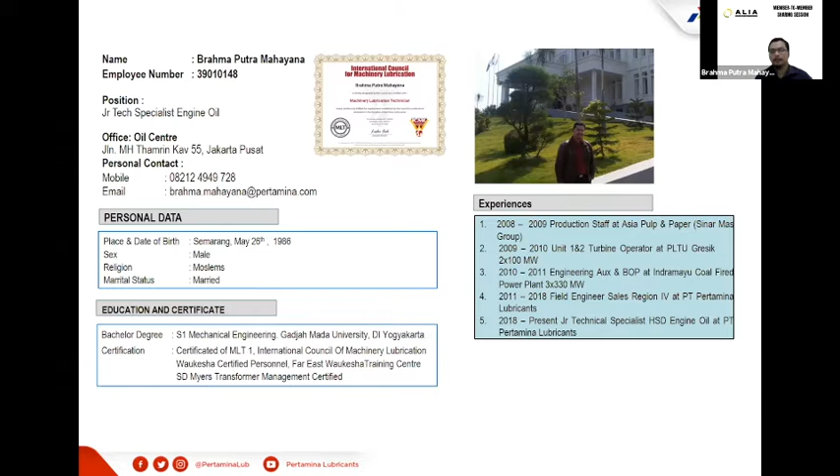Before joining PT Pertamina Lubricants, I had some experience in paper mill at Asia Pulp and Paper, and after that I worked in a power plant as a turbine operator, and then in engineering in auxiliary and balance of plant at Indramayu Coal Fired Power Plant. I joined PT Pertamina Lubricants in 2011, and until 2018 I was a field engineer for sales region 4. From 2018 until now, I'm in the position of junior technical specialist of high-speed diesel engine oil at PT Pertamina Lubricants. So basically about 9 to 10 years in the field of lubricant and lubrication.

Okay, let us continue. So what is the background of the implementation of biofuel in Indonesia? Biofuel in Indonesia is based on government regulation number 12, year 2015, about the provision, utilization, and administration of biofuel as other fuel. Our president, Joko Widodo, wanted to implement mandatory use of B30 in January 2020 and increase the bio content to 50% by the end of 2020, but until now we still use B30 in Indonesia.

So the roadmap starts in 2015 with some sectors like micro enterprise, fishery, agriculture, transportation and public service obligation, and also 15% in transportation non-PSO, industry and commercial, and 25% in power generation. But right now in 2021, most of all sectors are using 30% biofuel as their fuel.

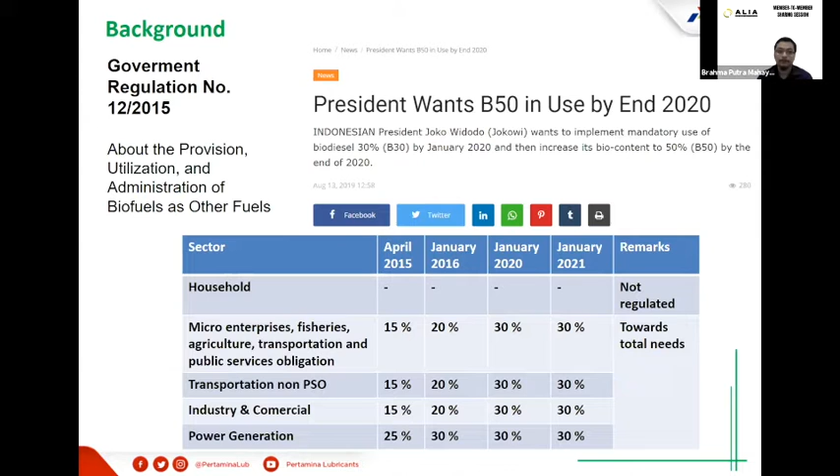Now the biodiesel that is used refers to vegetable oil or animal fat-based diesel fuel consisting of long-chain alkyl ester. In short, this is what we call FAME, which stands for fatty acid methyl ester. The notation or numbering of biodiesel is, for example, B20, which means it consists of 20% fatty acid methyl ester and 80% diesel fuel. Right now in Indonesia, we are using B30, meaning 30% FAME and 70% diesel fuel.

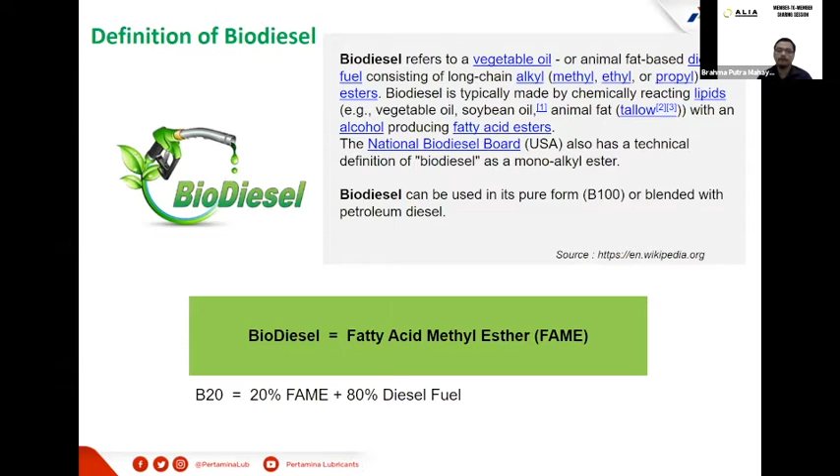So the FAME itself is produced by esterification of vegetable oil. Basically vegetable oil or other animal fat is combined with alcohol with some catalyst, producing glycerin and FAME.

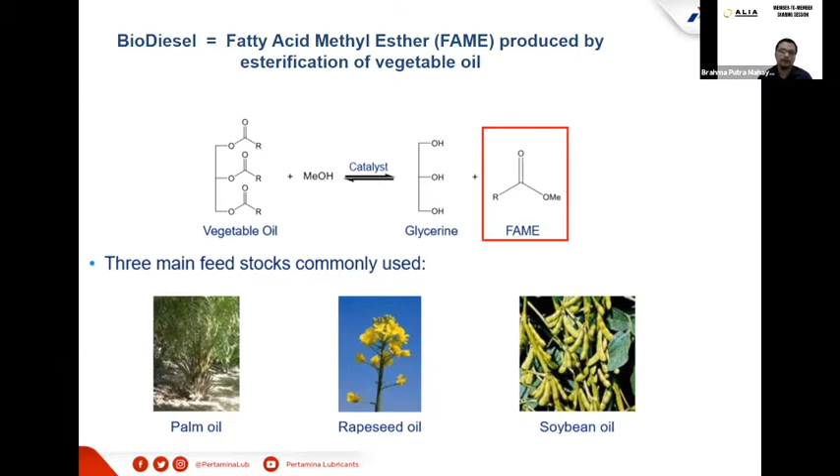The update is now the glycerin produced is lesser, and the quality of the FAME is increasing day by day. We can use a lot of types of feedstock, but commonly we use vegetable oil such as palm oil, rapeseed oil, and soybean oil. Now in Indonesia, because we have a lot of palm plantations, we naturally use palm oil as our main feedstock for biodiesel.

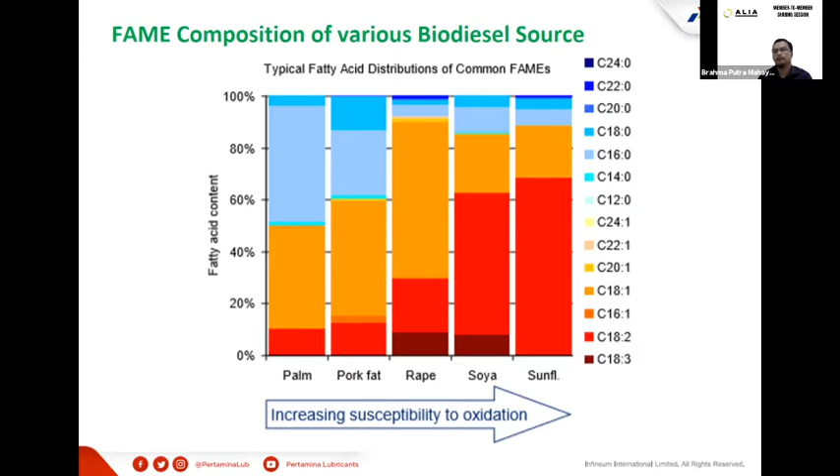Now the information here is that the impact of biofuel use in one area or country can be different from other countries, due to differences in the source of FAME that is used. So perhaps in Indonesia, the impact will be different from other countries that may use biofuel from soya or from sunflower.

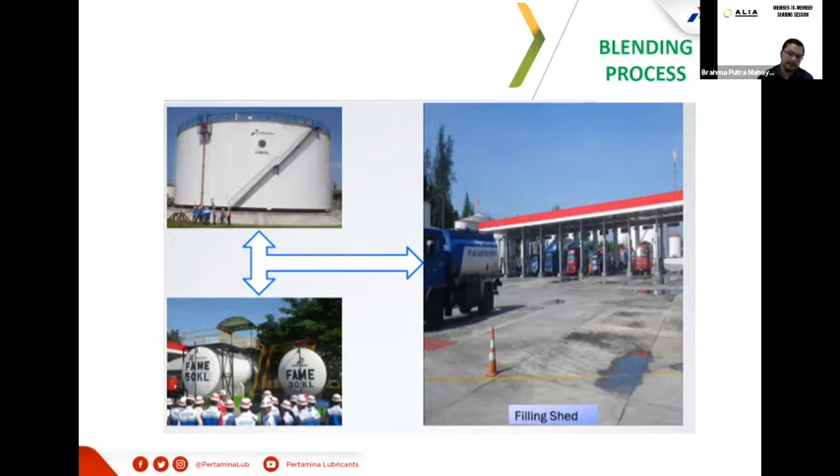About the blending process itself, in Indonesia, we separate the FAME and the diesel fuel in each tank. So when the customer needs the product or it's going to be transported to the customer, we will blend it in our filling shed and then transport it. This is because of limitations of our facility and also to localize problems if there are issues with the FAME, since as we will discuss later, FAME or biodiesel has some detrimental or negative characteristics.

This is the characteristic of the fuel from B0 until B30. Of course, there is a lot of difference. Number one is about the Cetane number. We can see that from B0 to B30, the Cetane number trend is increasing, increasing with the increase of FAME that is used.

Now this will have consequences for our combustion timing. With a higher Cetane number, your fuel is faster to burn, faster to combust. So when you don't change or reset the timing of combustion, and your fuel is faster to combust, the worst case is you have detonation, or the combustion happens faster before top dead center. So you must change or reset the timing setting to adjust with the Cetane number of the FAME.

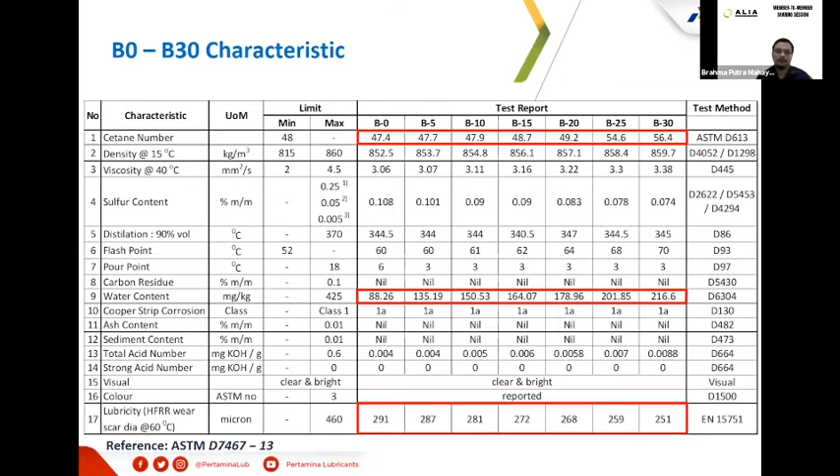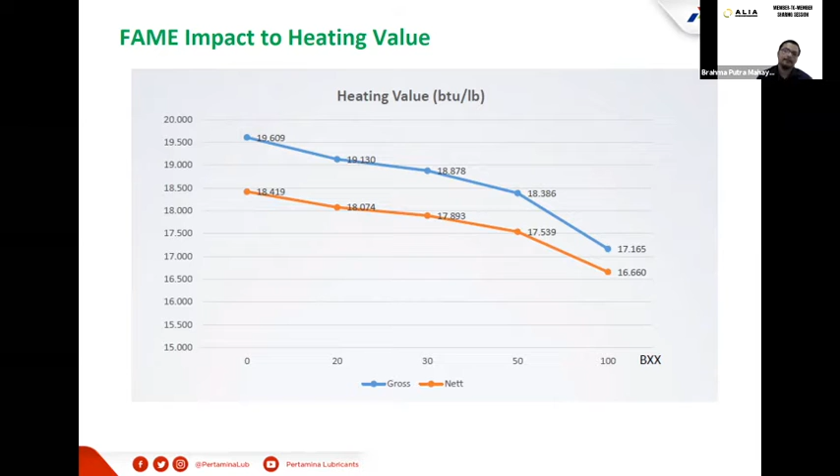Now, the other impact of FAME is in the heating value. This table shows us that with more percentage of FAME composition, the heating value of the fuel will decrease. So basically, the power that can be achieved becomes lower, and in some areas this will become a problem.

Now the biodiesel characteristics: one of them is hygroscopic. Biodiesel tends to absorb humidity in the air. This can lead to accumulation of water content, which is an oxidation promoter. So we can see in the data earlier that with higher FAME content, they have higher water content, because the biodiesel absorbs humidity in the air.

The second characteristic is oxidation stability. Biodiesel can oxidize during storage and handling, leading to formation of peroxide, gums, acid, and deposit. This is also promoted by the hygroscopic character. With water presence, the oxidation will increase.

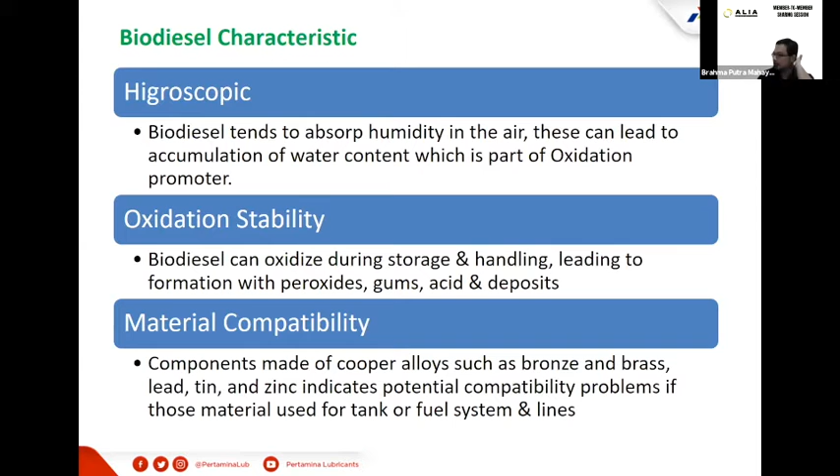Another characteristic of biodiesel is its material compatibility. Components like copper, such as bronze, brass, lead, tin, and zinc indicate potential compatibility problems if those materials are used for the tank or fuel system and lines. So we must be careful with material compatibility.

Another characteristic of biodiesel is its solvency. Biodiesel is an excellent solvent for cleaning any hydrocarbon deposits that may have formed in the fuel system. So actually it has a good effect, having excellent solvent characteristics.

But the bad news is those deposits from the fuel tank, from the fuel system, and from the hose will be transported into your combustion room. So it may clog your injector and make the combustion become more and more dirty. That's the solvency characteristic of biodiesel.

And the unique characteristic of biodiesel is it promotes microbial growth, like bacteria and fungi present in biodiesel fuel. Those bugs, which feed on hydrocarbons, if left unchecked, can contribute to filter plugging and corrosion, as well as other operational problems. So basically you have microorganisms in your fuel, and those bacteria will live in the water and consume the fuel.

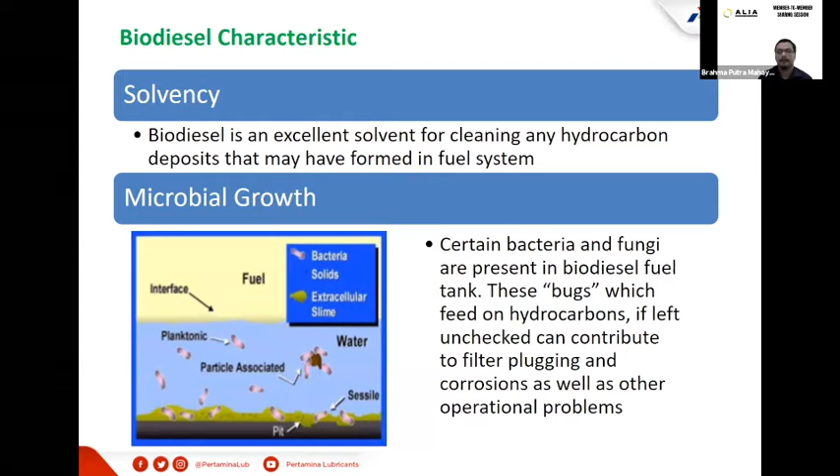And as the bacteria or microorganisms are active, they will produce side products, like sludge, that later on will contribute to filter plugging, and also promote corrosion.

Impact to lube oil: there's a lot of research about the impact of biofuel to lube oil, but in general, biodiesel FAME and its degradation products are lubricant contaminants, and it can potentially induce oxidation of lubricant, induce piston deposits, and induce soft metal corrosion of bearing surfaces and wear. So basically, biodiesel FAME and its degradation products are lubricant contaminants.

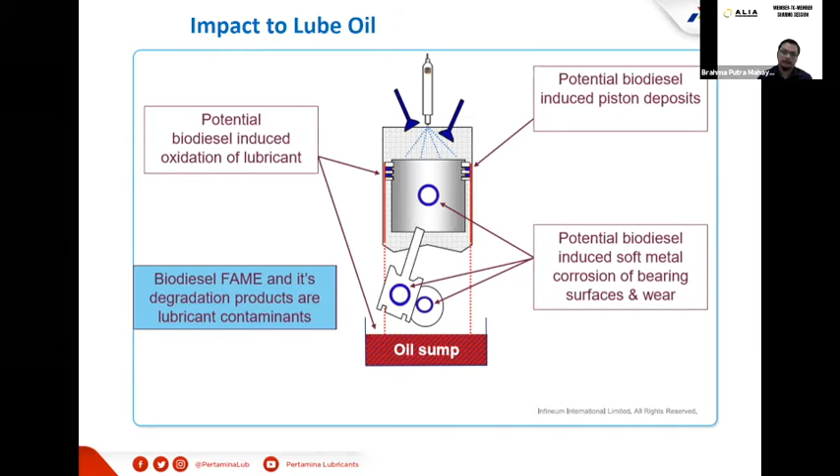In the field of lubricant, we know that contaminants are the enemy of our lube oil, and most problems related to oil happen due to contaminants. So in general, those are the impacts of biofuel to lube oil.

Now, if the main issue in the fuel system has already been resolved, no great impact is reported in lube oil, because the first thing that gets damaged is not the oil, but the fuel system itself. So if the customer resolves the issue with the fuel system, usually we don't have a problem with the lube oil. But with a poor fuel system and no good housekeeping practice, then the lube oil may have some problems.

Such as, due to imperfect combustion, more soot is generated. So the lube oil needs to work harder to clean and disperse soot and deposits. So it will need oil with better soot handling and dispersancy.

And the second problem is because biodiesel will promote hotter combustion chamber temperature. So because the temperature rises, the lube oil degrades faster. Viscosity index improver polymers will crack. So the oil will need better base oil and better additives to overcome thermal degradation.

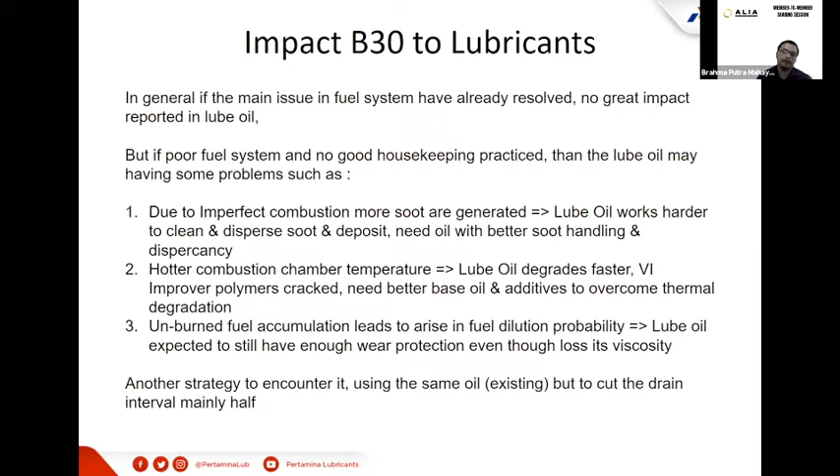This is one example of the impact of biofuel, seen in an oil analysis example. This is from one of our customers in Indonesia. You see that the main point is the TBN is dropping. TBN drop below limit indicates oil degradation or fuel contamination. Another aspect is we have soot and oxidation rising above normal.

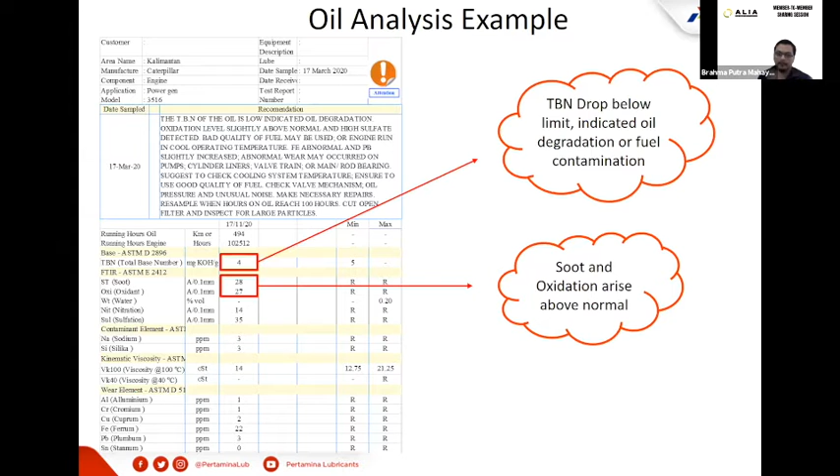Basically, we have some samples and oil analysis, and sometimes it happens. The impact of biofuel will decrease the TBN, make it drop, and will raise the soot and oxidation.

So the main issues in biofuel usage mostly are clogged injectors, damaged fuel pumps, bacteria growth, failed seals, blocked filters, and in some cases oil degradation or leakage. But like I said earlier, the impact to oil actually is not as big as the impact to the fuel system.

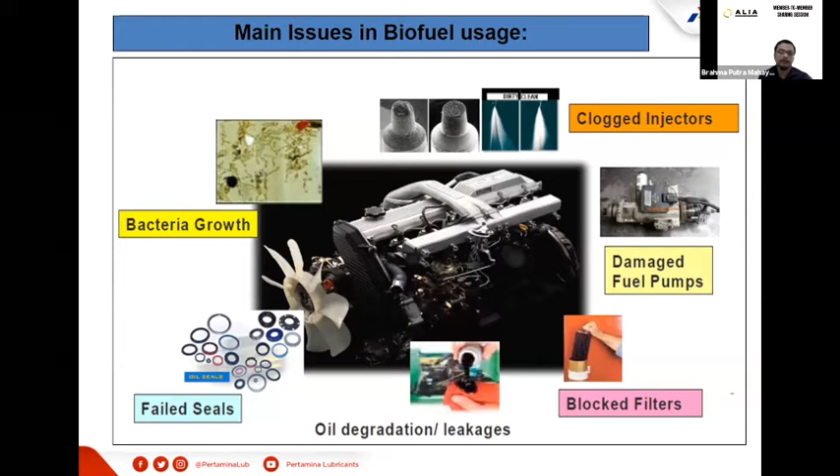Before the oil becomes bad from the biofuel, the fuel system and combustion will have the impact first, and the oil will degrade afterward. It's just an after-effect following the fuel system problem. So this is the main issue in biofuel usage.

Now let us talk about how the B30 regulation is affecting industry. We start with the marine industry. In marine industry, there are two types of engines used: the first is low and medium speed engines, and the second is high speed engines.

In low and medium speed engines, they actually don't have much problem with B30 because they are already accustomed to even more severe fuel quality like MFO. So in low and medium speed marine engines, B30 fuel has better acceptance due to its lower price than very low sulfur fuel oil. The only concern is reduced power when using B30.

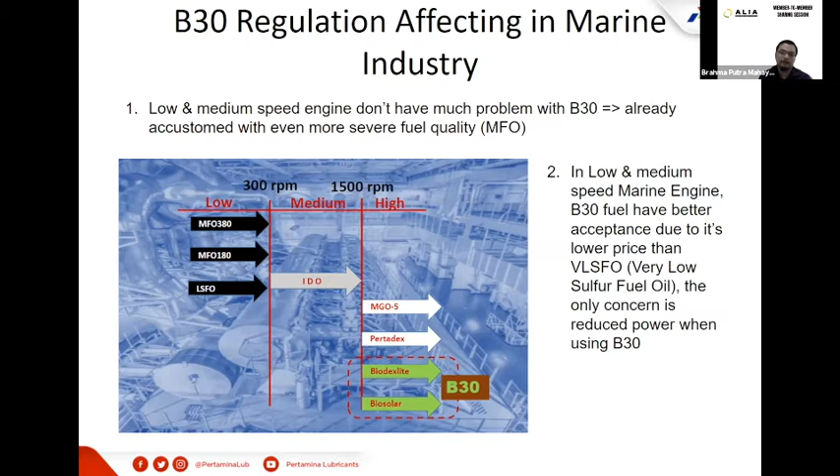In marine, aside from B30, there is also regulation for using VLSFO, very low sulfur fuel oil. Because its price is higher, B30 has better acceptance in low and medium speed marine engines. But the drawback is that power becomes reduced. Those are the concerns about using B30 in low and medium speed marine engines.

Now, high-speed diesel engines, mostly MTU, MAN, Volvo, Cummins, Caterpillar, and those already implementing common rail high-pressure pumps, face a lot of difficulties such as fuel filter blocking and worn injectors. But for non-common rail high-speed diesel engines like Yanmar, Niigata, and some China OEMs, only filter blocking issues are reported.

So it's different again. Like in low and medium speed engines, in high speed it's also different depending on whether they already implement common rail high pressure pumps or are non-common rail high-speed diesel engines.

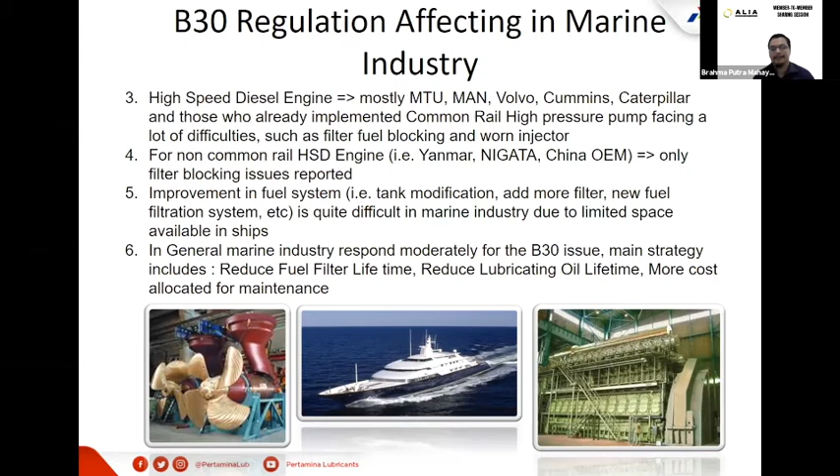Now, different from marine, the fleet industry is also different. Buses, trucks, and also passenger or commercial cars actually don't do much in response to B30 because their OEMs have already taken action, like Hino, Mercedes-Benz, UD, and Mitsubishi. They have already proclaimed that their vehicles are ready to use B30.

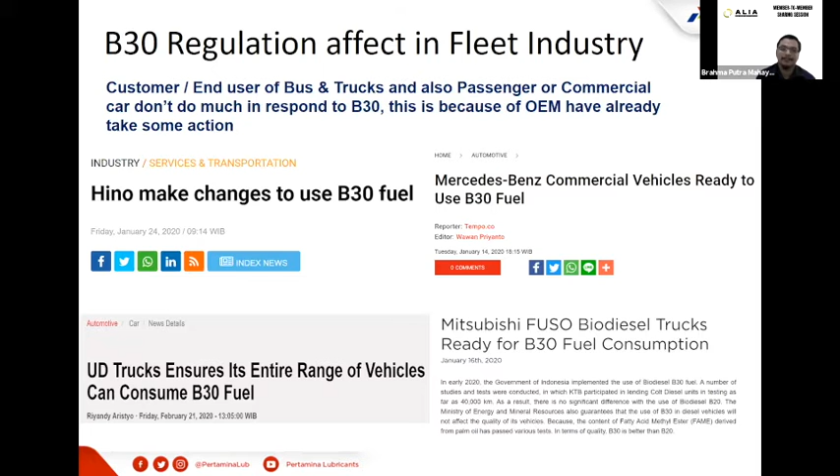But what exactly do they do? One example is what Hino does: they enlarge fuel filter size and capacity, give nickel plating on the fuel pipe and fuel sender gauge, change fuel hose material into fluororubber, give aluminum plating for the fuel tank, and add extra strainers in the fuel system.

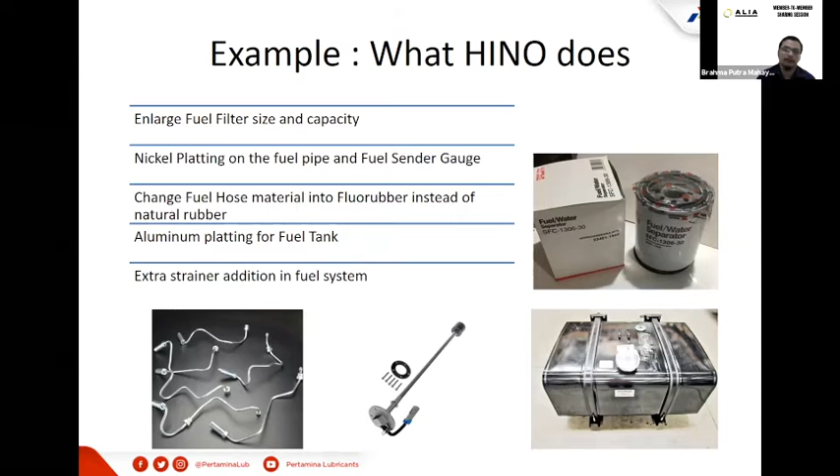Those packages are installed in new vehicles, but for older vehicles already sold to customers, they also provide a retrofit package, sometimes given free or promotional to customers. Now, in mining and power generation industry, since biodiesel fuel usage had dropped the fuel characteristics under equipment requirements, the mining and power generation industry has great concern with B30 impact. In response to mitigate that issue, they came up with improvements in every step of the fuel transfer system.

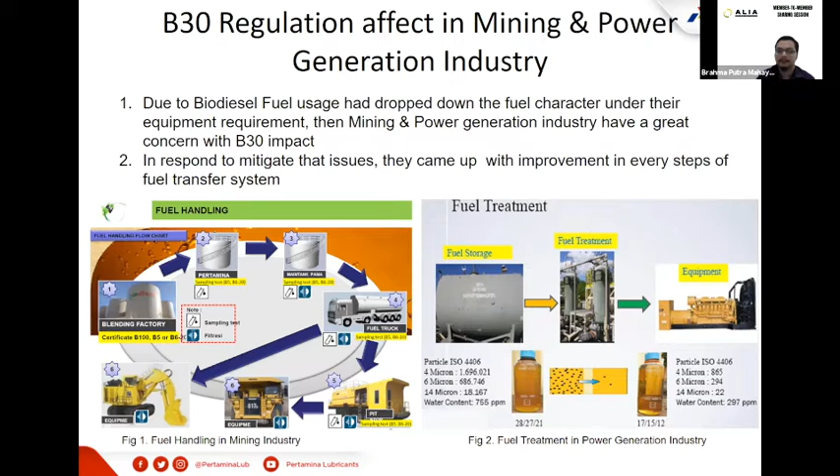So basically, they do something about the fuel system or fuel handling in every step of the fuel distribution. On the left is fuel handling in the mining industry, where they add filters, hot filter, separator, and dehydrator. On the right is the example of fuel treatment in the power generation industry, which basically adds filter and separator.

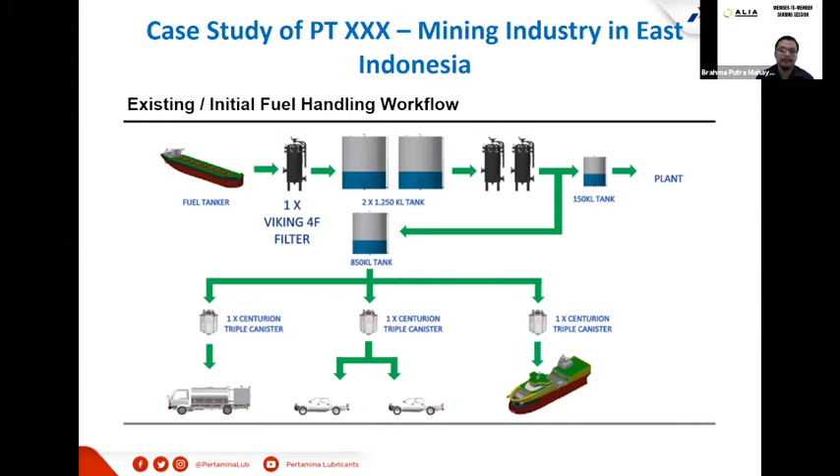Now this is a case study of one of our customers in the mining industry in East Indonesia. This is the existing or initial fuel handling workflow from fuel tanker. They have filters and store it in a storage tank, then from main storage tank into daily tank, and then distribute to the unit that needs the fuel. This is the existing workflow.

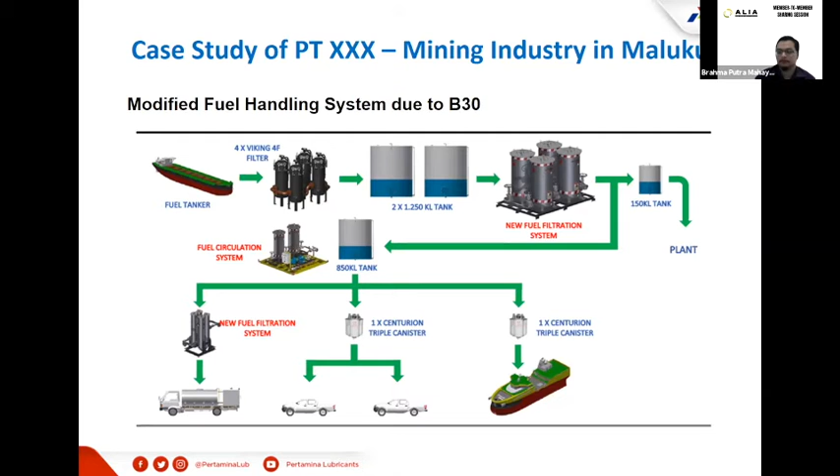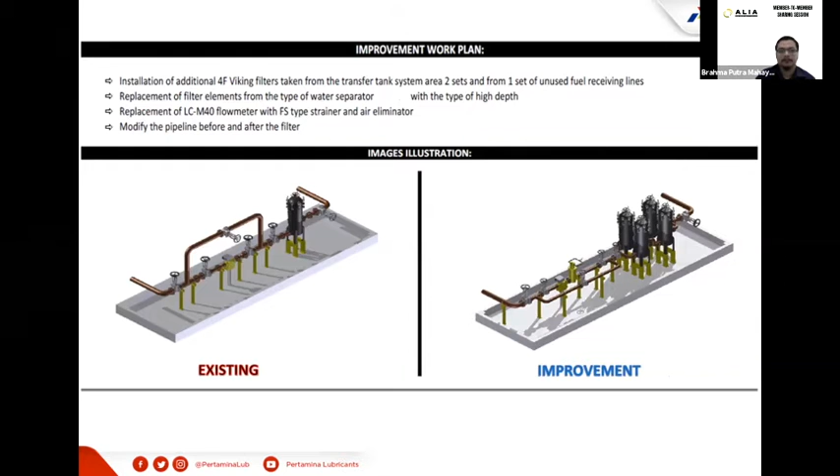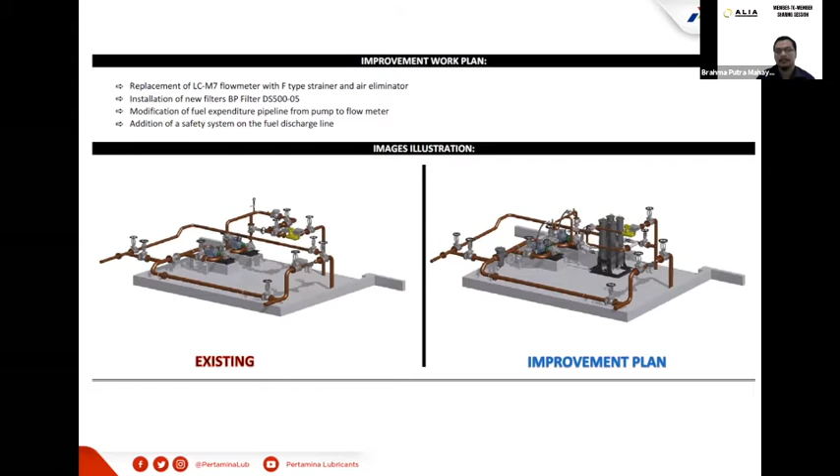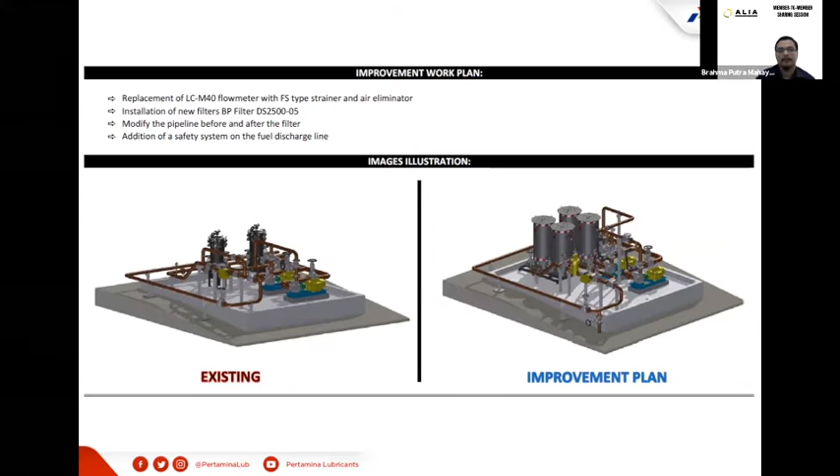Because of the implementation of B30, they modified their fuel handling system using a new fuel filtration system. They installed a new fuel circulation system, modified some lines and similar things. We can see the example from existing on the left, and the improvement consists of installation of additional filter, replacement of filter element, replacement of flow meter, and modifying the pipeline. Also another improvement: replace flow meter, install new filter, modification of fuel expenditure pipeline, and addition of safety system on the fuel discharge line. The same applies elsewhere - replace flow meter, install new filters, modify pipeline, and add safety systems.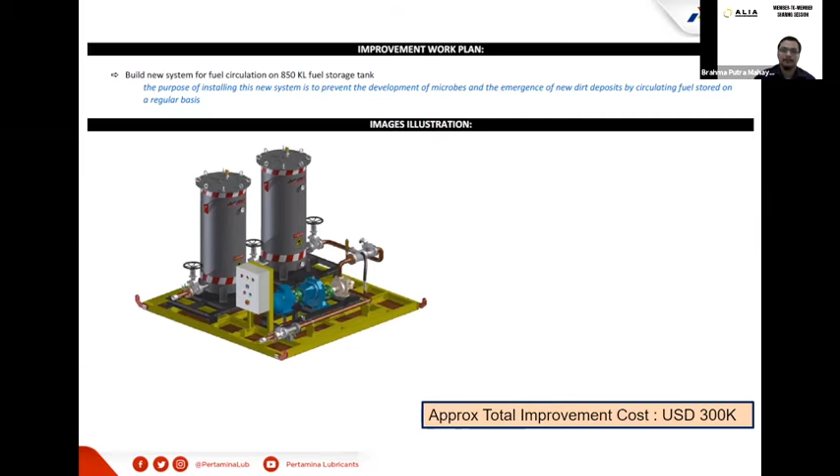This is to build a new system for fuel circulation on an 850 kL fuel storage tank. So this customer spent approximately 300,000 US dollars to improve their fuel system so it's B30 ready. That's one example of a customer.

So extra cost for B30 implementation can be divided into two categories. Initial cost consists of new filter, new fuel circulation system, new water separation system, and improvement in existing fuel system, like changing hose material and similar things. The second category is operating costs, like material costs - more filter elements, more injector parts, more increase in lube oil consumption. Also labor costs, because of more frequent maintenance, more to-do list in every shift, and also breakdown costs when your unit has a breakdown due to impact of the fuel.

Now, initial cost looks very big at first, like 300,000 US dollars, quite big. This makes a lot of industries think more about implementing it, but in the long term, those improvements will actually reduce operating costs. Vice versa, if the industry chose to skip initial costs, it may save some in advance, but more operating costs must be prepared in the long run.

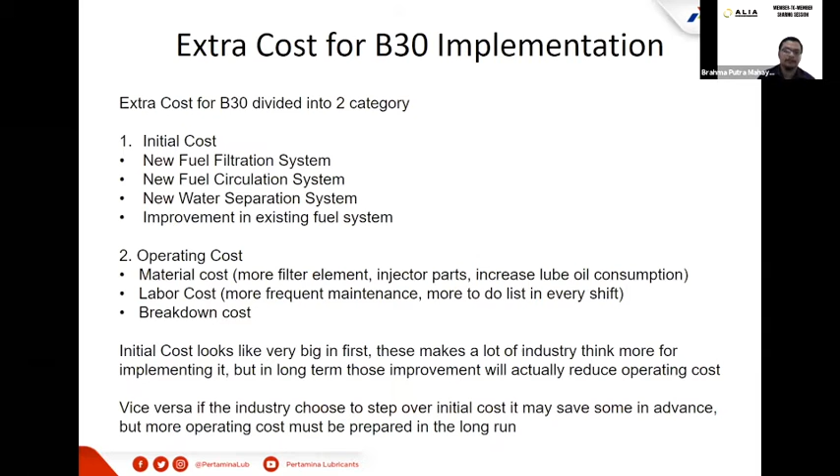So the strategy is different. Some industries invest in initial cost, but other industries may think it's okay to allocate more cost in operating costs instead.

In summary, this biofuel regulation affects industries at different scales depending on the current fuel being used and the character of the industry. In marine, because they're already used to using MFO, the more severe, worse fuel, they don't mind about B30. But in mining and power generation, they're concerned a lot about this. Mining industry spends extra cost for improvement in fuel system higher than other industries, because mining is a very competitive industry, and they concern a lot about the improvement in fuel system.

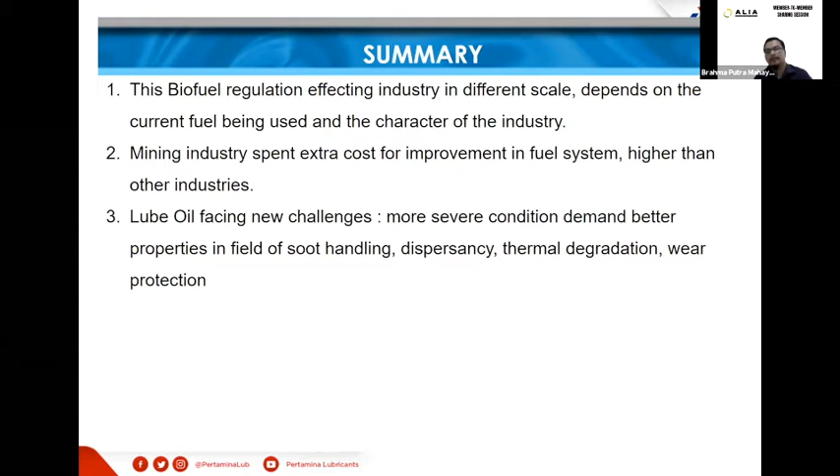Now, lube oil is facing new challenges. More severe conditions demand better properties in soot handling, dispersency, thermal degradation, and wear protection.